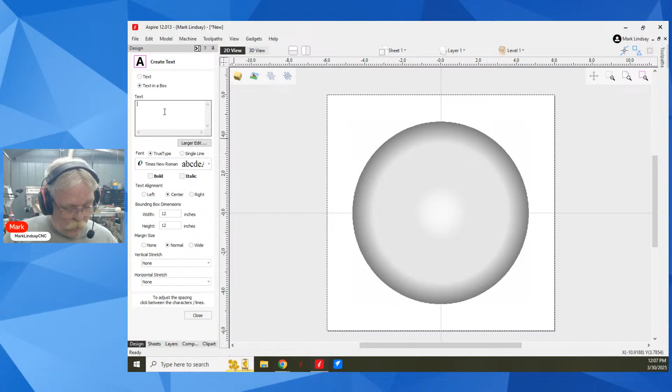Now I'm going to take my first initial, and as soon as all my fonts load up, I'll use Times New Roman. Good old standby, everybody's got it. Let me make it smaller so it fits in my dome. There we go. So I've got my curved surface and I've got my vector that I want to V-carve.

So we'll go over here. I'm going to select - well, first I have to do a 3D toolpath. Just for this demonstration, I'll set thickness, yada yada, everything is good. I'll put a gap above the model of 10 thousandths, which is what I normally do. I'll use a half-inch ball nose because it'll make this a lot faster.

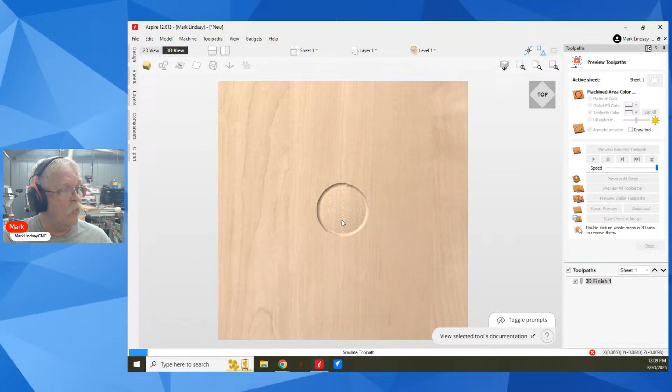I'll do the model boundary with a boundary offset of 0.5. We'll calculate it, get my shape here, and preview that toolpath. It's going to be kind of rough shaped because I don't have the step over set right, but it'll still work.

Let this get through. Evidently I've got my display set to maximum, which is why it's taking so long to run this. Come on, you can do it faster than this. I know you can. I've got my display set too high and I can't change it now. It's already too late, so I'll just tap dance here.

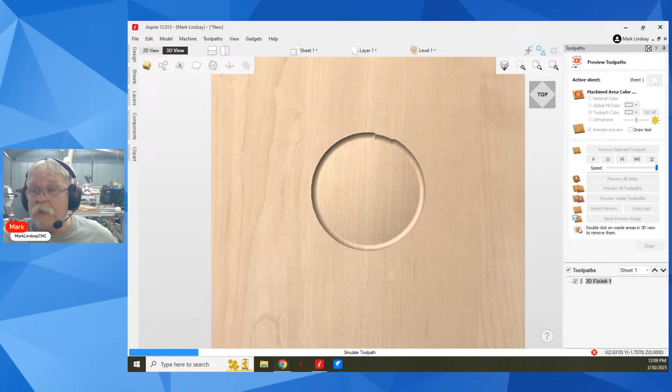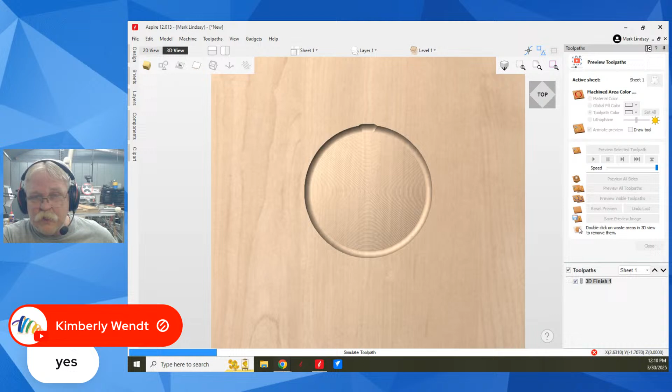Let me cruise up here and see if Kimberly has added any extra information here. Nope, I'm not seeing it. I don't know if that means a Fibonacci sequence or if she was answering somebody else's question.

Okay, the lot is the shape of a pentagon, and the 1,800 square foot house is the base of the pentagon. All right, that'll help a little bit. And you want the Fibonacci sequence? Yeah, we can do that.

Let me get through this slow thing here, and then we'll get into it. Basically, Kimberly, you can import anything into anything and then line it up any way you want to.

That is, if you're doing your design work in Vectric Software, which I have been known to do quite often. As a matter of fact, I designed my Shades and Mustache logo in Vcarve Pro, then imported it into Inkscape at the time and filled in all the colors, and that's why it looks the way it looks. But yeah, I drew it up in Vcarve Pro because I don't know how to use Adobe Illustrator or any of these other graphics programs.

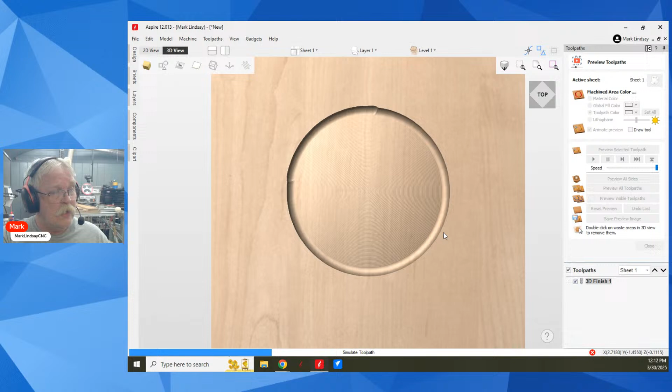Okay, I think this is good enough to demonstrate this. So here's another tip: if you ever need to stop a simulation in midstream, look down here where it says Simulate Toolpath, and over here you'll see a red X. You can click on that red X and it'll get to the next natural stop point within the toolpath, and it'll stop like it just did right there.

Okay, so now I've got my shape more or less. I can take my vector here and do a V-carve toolpath. Now I'll use a flat depth of 0.1 just for giggles. I'm going to get rid of that 15-degree V-bit and go with a 90-degree V-bit, select it, and I'll use an eighth-inch end mill should I need to.

And here is the secret: you come down to the bottom here, project toolpath onto 3D model, and put a check mark there. You don't need to worry about start depths, you can use a flat depth if you want to - I'm going to because it's fairly large.

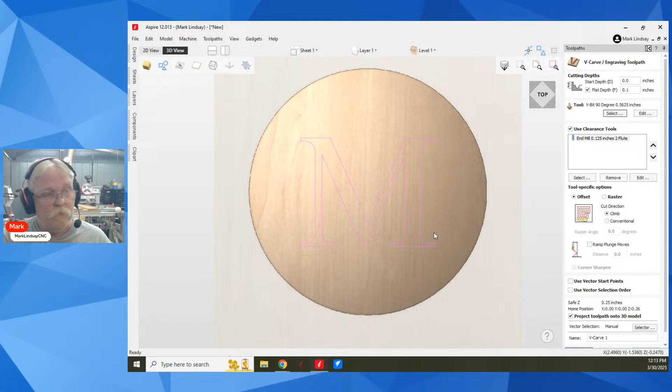And I don't want it to try to cut through the model. But it's that check mark right there that projects this toolpath onto the surface and makes that toolpath follow the shape of this surface.

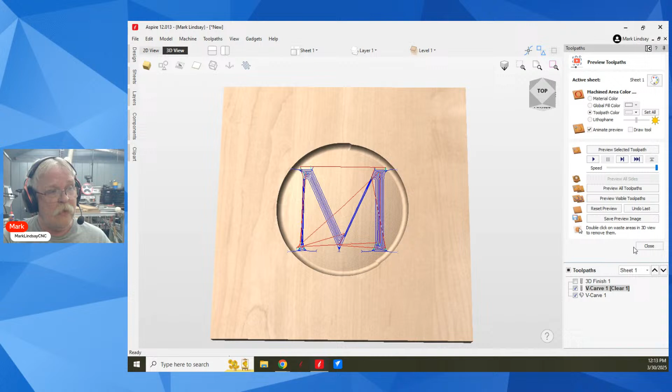So we'll calculate it. And it might work, it might not work. Let's see, I'm going to run the clearance first, that 1/8 inch clearance bit is going to run. And that'll carve that out. Then I'll come down to the Vcarve, and this is going to use the 90 degree V-bit, and it'll finish this whole thing up. Yeah, I should have let it run all the way.

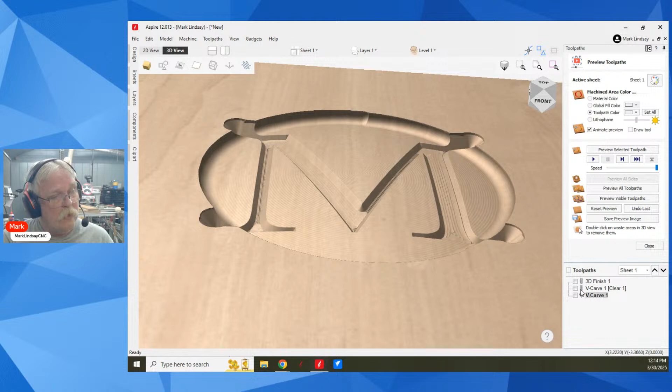But we don't have time for that. So that's how you get that Vcarve toolpath to follow the surface, is that little check mark right there. And that'll take care of it.

So all right, let's close that up. And we'll reset this preview because it's ugly. Go back up to the top and come back in full screen.

Okay, email me a photo, but no, I don't always have access in my shop. We can work on this tomorrow evening, Kimberly, if that's all right with you.

We'll get into it, but basically, yes, you can import anything into anything. You can import an image into anything. And then it's just a matter of how you want to line it up. So yeah, all right Michael, I hope that answers your question.

Like I said, just that check mark. Yes, I'm going to change it now, John. Thank you.

And for those of you who don't know what I'm talking about, let's take a look at it here. I'm going to close out of my preview. And I'm going to go up into Toolpaths. And I'm going to come down here to Preview Simulation Quality.

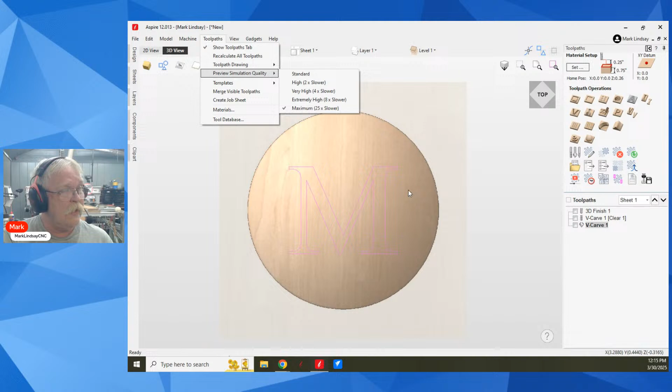This affects only this preview window. I have it at maximum because I left it as I was demonstrating something with it and left it there. When usually I'm out here broadcasting like this, I'll take it to high. And that speeds up the preview process, or it should.

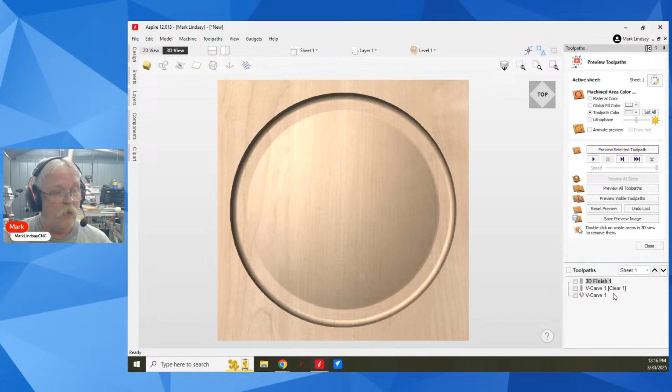Let's see, I'm also going to turn off animate the preview. And now let's see if this runs any faster. Look at how much faster that's running. It's not animating it, you don't see the tool, you don't see the tool path run. And isn't that better? Yes, it's much better.

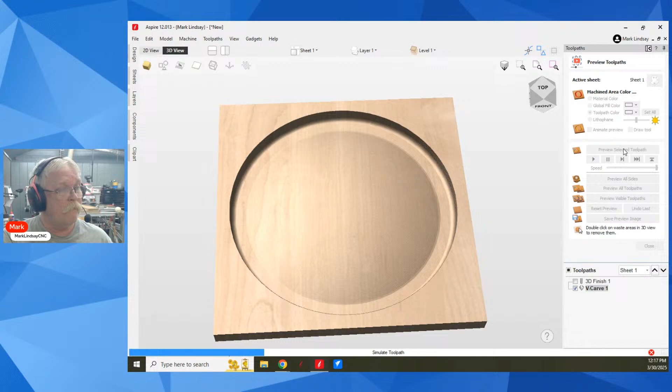Now let me go back in here and let me take out the clearance tool and just run the 90 degree V-bit. Calculate that. And let's run it, and there you go. That's a better demonstration. See how much faster that works when you're not trying to show off every little piece and get the best quality.

So there you go, all right, we'll reset the preview, close that, and come out of here. All righty.

So let's see here, we've got another one from Ralph Balchin, who says, when you need something to add to your program, will you spend some time discussing the use of layers? I continue getting layers intertwined and have screwed up several stack text projects. Okay, we can talk about that, Ralph.

The thing to remember about layers, let's come back over here into the 2D view. I'm going to delete these two toolpaths. Delete all, boom, don't need them. Come back over here and I'll get rid of the 3D model, I don't need it.

The thing to remember about layers is, first off, when I demonstrate layers, a lot of times I'll leave them named layer 1, layer 2, layer 3. Let's make this easy, let's go over to layers, I'll add a new layer. And again, add a new layer and add a new layer. Normally when I'm demonstrating, I leave them named layer 1, layer 2, layer 3, layer 4.

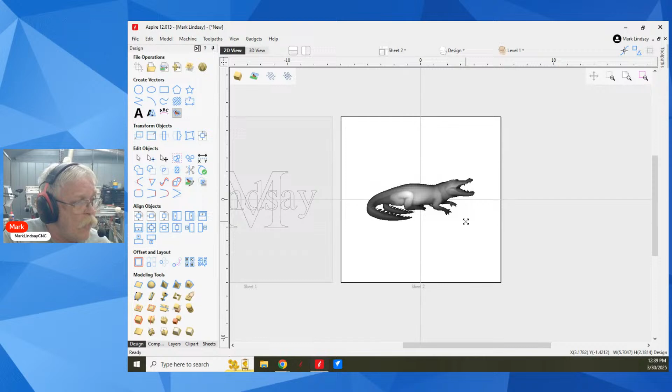Sad to say that Wally is only available on Aspire. He's not a Vcarve model, but he's got just enough detail to cheese me off, and he makes a good demonstration.

Ralph says thanks, Mark, I just need to be careful with layers, and I'll continue to use and associating with toolpath. Yeah, and Steve right there, ba-boom, right on the money every time.

Yes, there's my stacked text video, and again, I'll put a link in the description as soon as we're done live here.

Wally's got a little bit of detail, but just enough to cheese me off, but not enough to be overly dramatic, if you get my drift. So let's go over

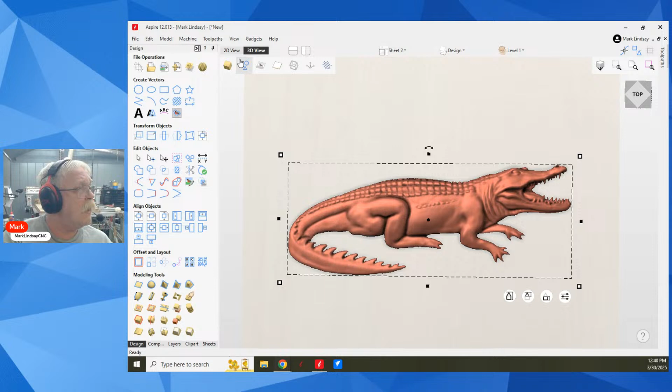and let's do a 3D finishing toolpath. Of course, it's going to send me into material setup. I'll put a gap of 0.01 above the model. He's only a 1/2 inch thick. Okay, we're good there - a little more than a 1/2 inch actually. We're all right.

Now, this would be an extreme case. Let's look at using an 1/8 inch ball nose. That's more of a 1/16 inch tapered ball nose - that's more realistic.

We're going to do modeled boundary, and I'll go with a 1/4 inch boundary offset. And what that means is the bit's going to cut outward away from the model by a 1/4 inch.

Fair warning, okay? If you use material boundary, it's going to go outside of your material a 1/4 inch. If you use a zero plane, if you have Wally down in a dish and you use model boundary, the minute you add a zero plane, it becomes part of the model. So fair warning: if you use model boundary with a zero plane, or material boundary with or without a zero plane, any boundary offset you set is going to carve off of the material by the distance of that boundary offset. Be careful when using either of these.

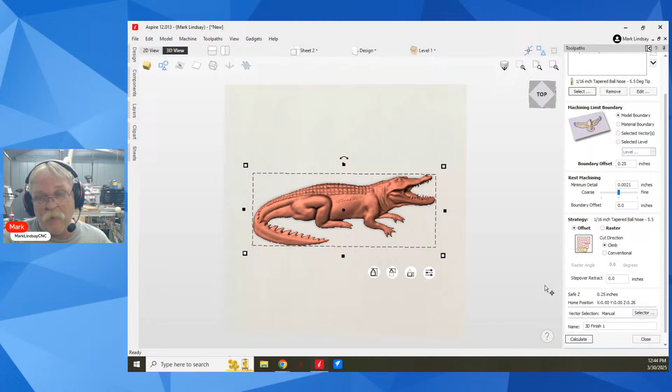Preview early, preview often—that's my motto. Calculate it, and we see it's made two tool paths. This is the first tool path—it's going to carve away most of the material. Turn that off, and we'll turn this on. This is all that 1/16 inch ball nose is going to carve.

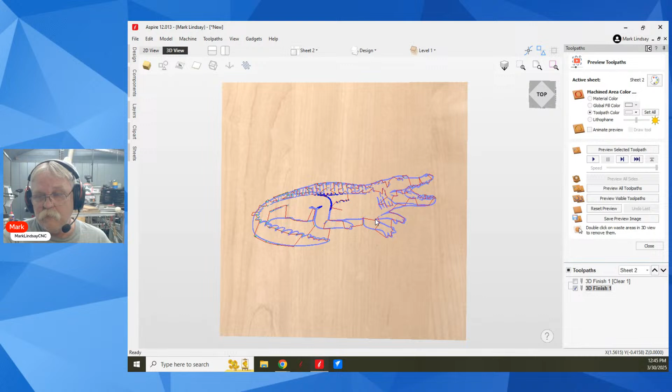I forgot to mention one thing. Let me go back into the toolpath. You have a separate boundary offset for rest machining. When we looked at that 1/16 of an inch, which is the lighter blue in this case, you can see it's not coming out very far. I'm going to go ahead and make it the same as the boundary offset for my clearance.

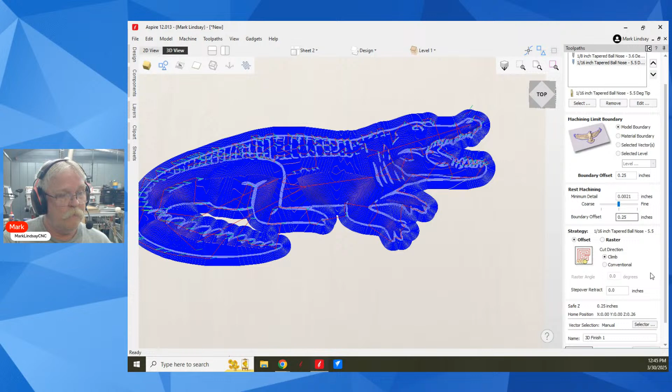0.25, just so we can see it. And that, there we go. Now I'll calculate. So the rest machining is going to come out the same distance as the 3D finish, the clearance. So we'll do the first one.

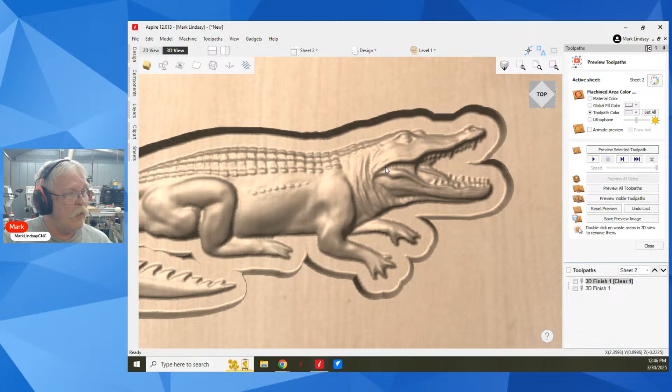And there's Wally. We've got some fairly decent detail here, but around his eyes, his mouth, that 1/8 inch bit just isn't quite cutting it. We see some roughness up in here that the 1/8 inch bit can only go so far. So now we look at the 3D finish using the 1/16 inch bit. We can't really see much of a difference until we zoom in, and we see a lot more detail right here.

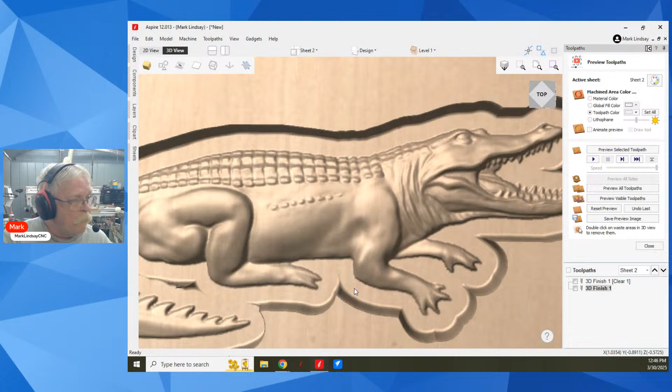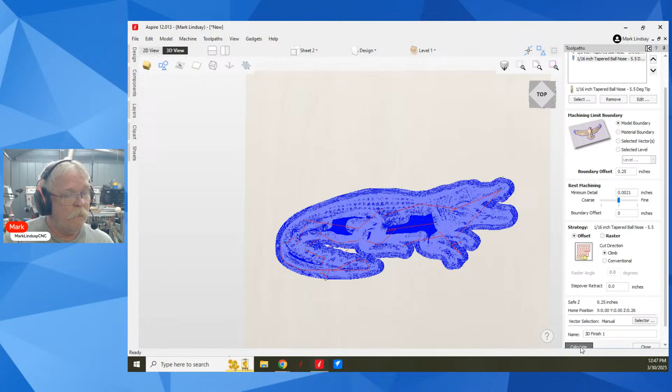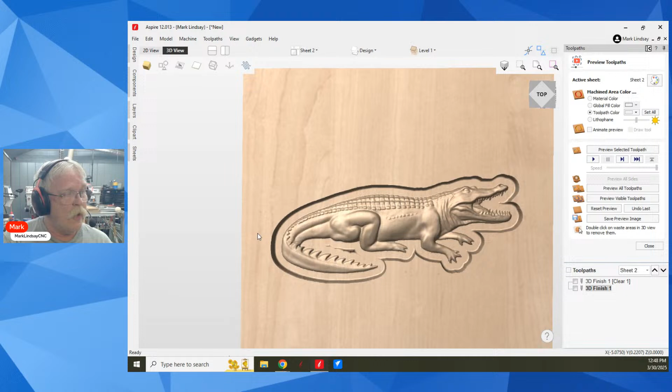But let's go back and take a look at something. If I come back in here and don't use a boundary offset, this is going to illustrate one of the cons. Calculate it. Now we'll reset the preview and preview this one first. Again, looks pretty decent. But here I don't have any kind of offset. When I preview that, it cleaned up around the edges and defined these rectangles a little bit.

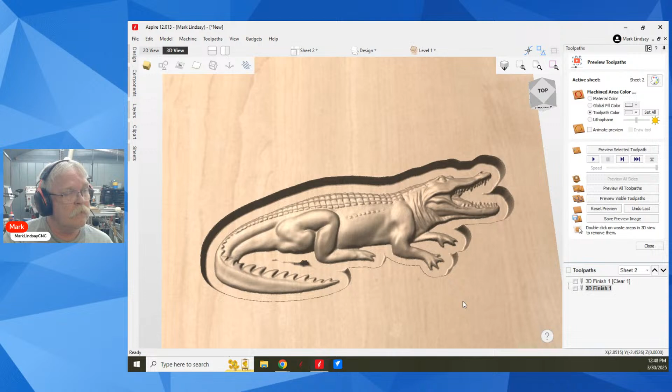But if I zoom in here and look, we can see a little shadow line right there. Okay, this comes down to modeling resolution and the diameter of the bit. We can really get down in the weeds here.

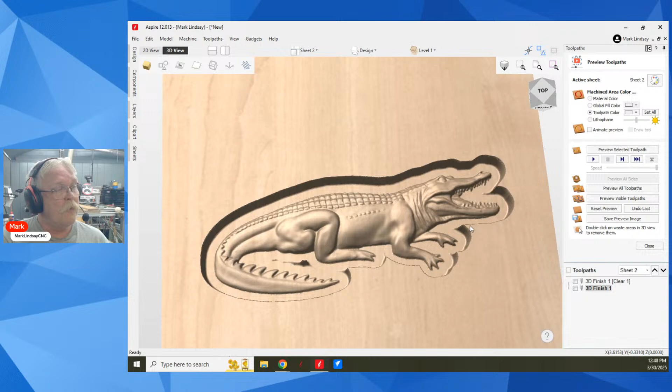Won't the simulation resolution also make a difference in how you see the results on screen? Yes, and that's all it affects—that's the simulation resolution up here, preview simulation quality. But if we look down here, we can see a little shadow line right there. It's because we didn't use that boundary offset. And like I said, this gets way down in the weeds.

When you first set up your job, you set your modeling resolution. You're dividing up the surface of the material. In this case, because I have it on its lowest setting, I've divided up the surface of this material into 1 million points or pixels.

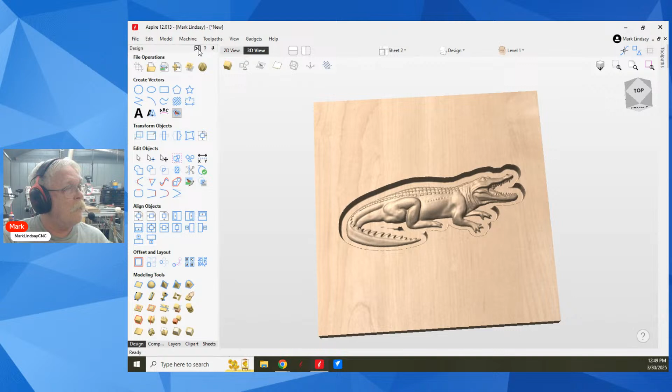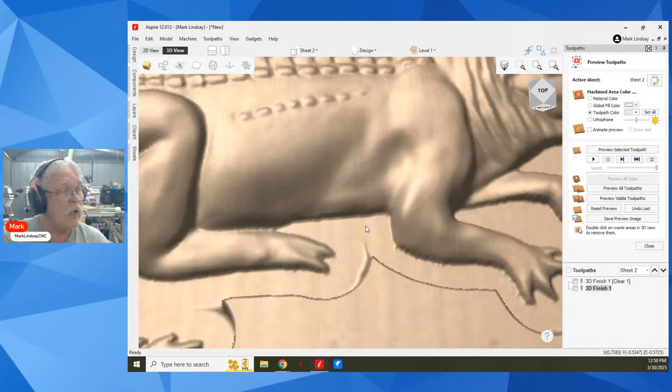Because the tip of this bit is smaller, it can carve pixels that the 1/8 inch bit can't. That usually means you're going to get this little shadow line where your rest machining bit, this smaller bit, will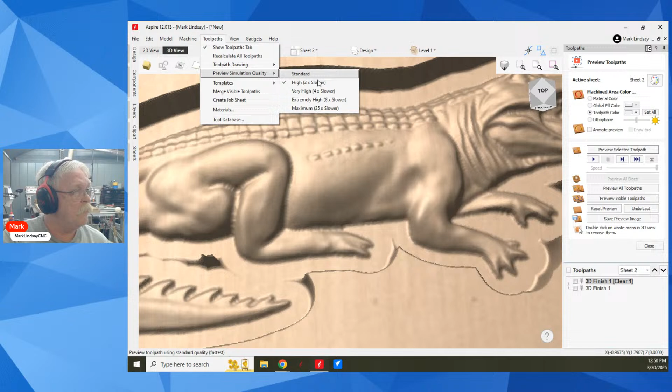Actually cut deeper than that 1/8 inch bit. So the way to combat that, let me reset the preview. I shouldn't have done that. Let me go ahead and do this here. Preview. Then I think I should be able to do that. Nope, it's going to make me redo it all anyway.

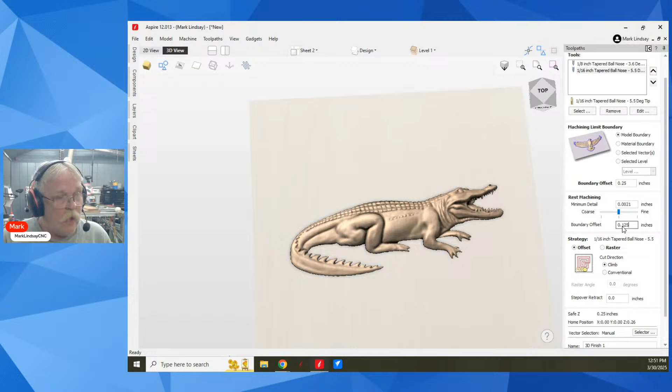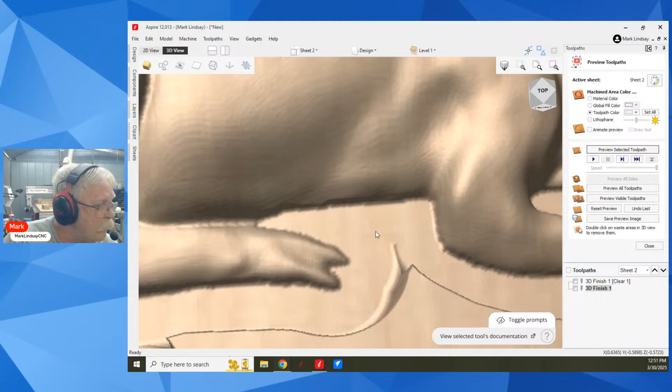I'm trying to make this shadow line more visible. Okay. And that didn't do anything. It didn't make it more visible or less visible. There is a shadow line. You can't really see it here in the preview.

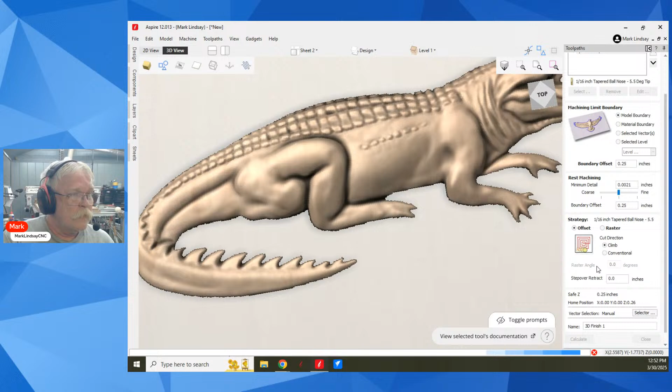But suffice it to say, if you bring that boundary offset out to the same boundary offset you have out here, you will get rid of that shadow line. There won't be one at all. But again, you're also taking a chance that you're not going to be carving into something else. By making that offset, it's not just going out here, it's also going up in here. So you may be recarving something up in here that you didn't want to carve into.

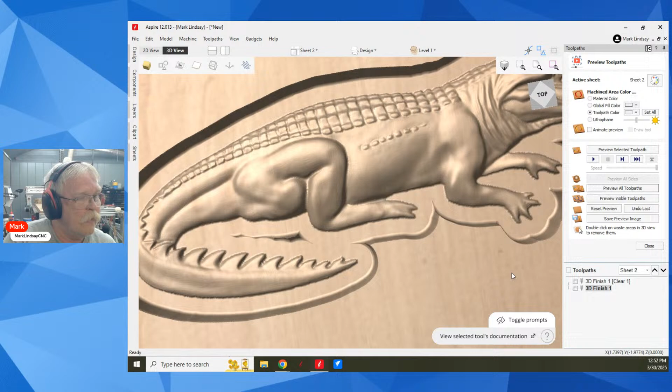You may be creating shadow lines out here. You may also be creating shadow lines up here. If we look at where this goes, you see how it's recarving up in this area as well. So this is something you need to play with. It may work out perfectly for you. It may not. A lot of people don't like rest machining at all.

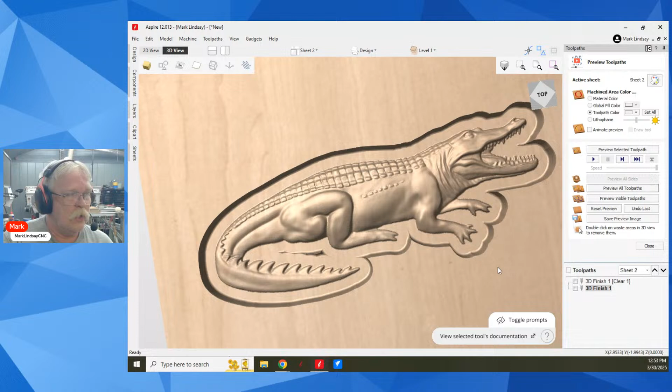And so what they'll do is just use the smallest bit and not use a larger bit. That works okay if you don't mind the extended finishing time. Now we're going to do the whole thing with that 1/16 inch bit. It only added about 12 minutes to the machine time, but depending upon how intricate your design is out here, it could double or triple it.

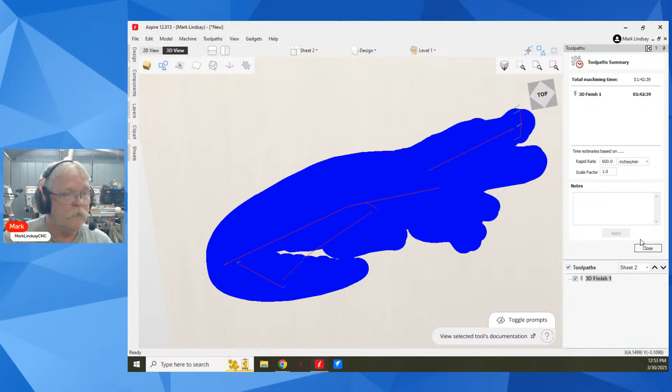So it's a balancing act. They both have their place and they both work very well. Rest machining I use on occasion, but generally speaking, not really. I'll just go ahead and carve the whole thing with the smaller bit, you know.

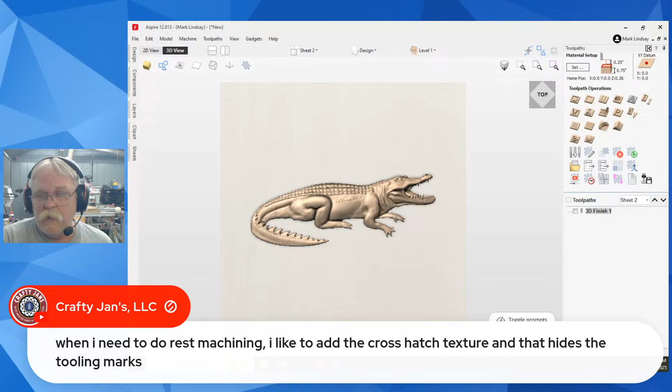So Kurt over at Crafty Jans has a tip. He says when I do rest machining, I like to add the cross hatch texture that hides the tooling marks. And what Kurt is talking about is adding a texture to the background, and yes, it does hide those machining marks. I will be doing a video on that soon.

I'm definitely going to do these two icons here, they're going to be my next video. I may do that crosshatch texture as a separate video after that.

Wendell says you need to get the Z0 on both bits the same and have a machine with good repeatability. Yes, that is true. And it's good that you mentioned that, Wendell, because machine repeatability is something that a lot of people don't discuss, because you have varying degrees of repeatability. For instance, repeatability on my Avid CNC is 1 thou. So there's 1 thou. The repeatability on my touch plate is 1 thou. So there's two, you know, so things can compound.

Now you add that with what we tend to do, like if I'm going to surface one of these pieces of material here, using my cursor like you can see it, if I'm going to surface one of these pieces of sapele here, and I set my Z0 to the surface, my machine is repeatable within 1 thou, and my touch plate is repeatable within 1 thou. But that does not necessarily mean I'm going to get all three of these pieces of material to the exact same thickness. They could be a few thou off either way. So the potential is there for this piece to be 4 thou thinner or thicker than this piece.

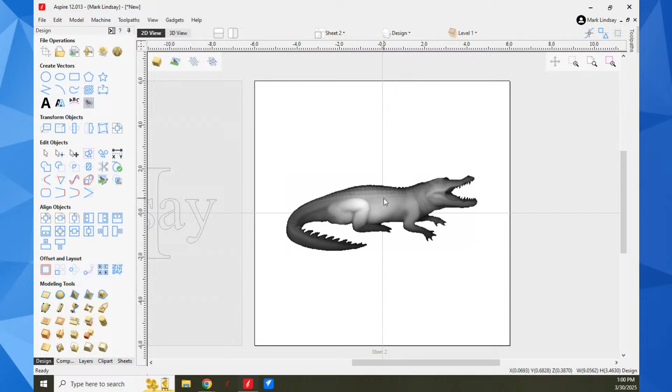All right, let's see here. We'll go back over to the 2D view and we'll get rid of... well, I'm not going to get rid of Wally. I'll go back over to my first sheet by double clicking that first sheet. Now, you want to draw a line and you want it to be straight. This is where you make sure you have geometry snapping and smart snapping turned on, specifically smart snapping. Smart snapping is going to help you in this endeavor, Alan. We'll come over here and I'll click.

Now we've got several ways we can draw a line. One is just freehand out here. You see this guideline? You see how my cursor says 0.0? Right now we're at length 7.5, angle 0.0. That's a straight line. Click, then spacebar to accept that line. Now, if you look, as I zoom in, you may see little zigzags on occasion.

But those zigzags aren't really there. What it is, is your screen refreshing as you zoom in. Now, I can come in here with it selected, go into node editing. There are two nodes, start point and stop point. Come out of node editing.

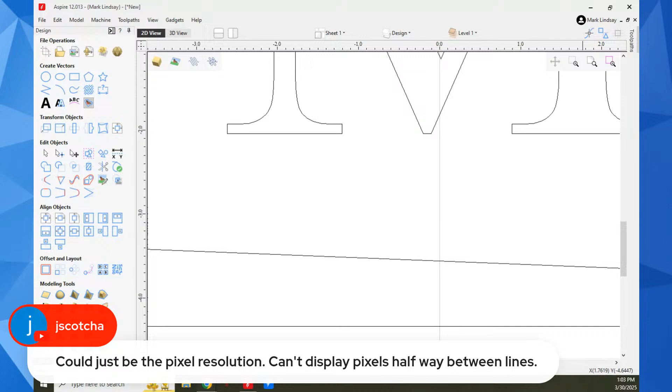Now, another way to draw a line that doesn't rely on how steady your hand is, Alan - we'll start the line here, and we'll come out here where we want the line to start. Click, and I'm going to drag in a direction, but I'm not going to click. I'm not even going to touch the mouse. Instead, I'm going to come up here and set an angle. I want an angle of 0, and I want a length of 7 inches. Then I'll click Add, and that created my 7-inch line, perfectly straight because my angle was 0.

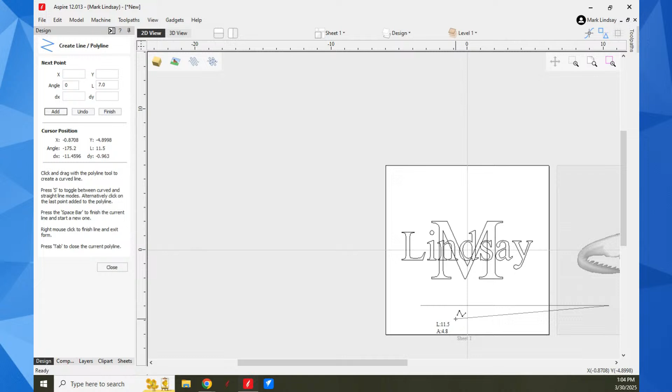Okay, again I have to spacebar to accept that line. Well, nope, I spacebarred and it did it again. Control Z, close. And there's my line. And again, start point, end point, node editing, there we go.

So there is always more than one way to skin the proverbial cat. It comes down to whichever way you prefer. You can draw a line and rely on smart snapping, or you can use these points here.

When you're in the 3D view, things get a little bit dicier because you have to be right on top of what you're drawing. And that's because of a phenomenon known as parallax.

If you are off, let's do an extreme example here. No, let's do that. And I go to draw a line out here. It's going to tell me where I am, but am I sure where this is actually being drawn? And am I certain this is straight?

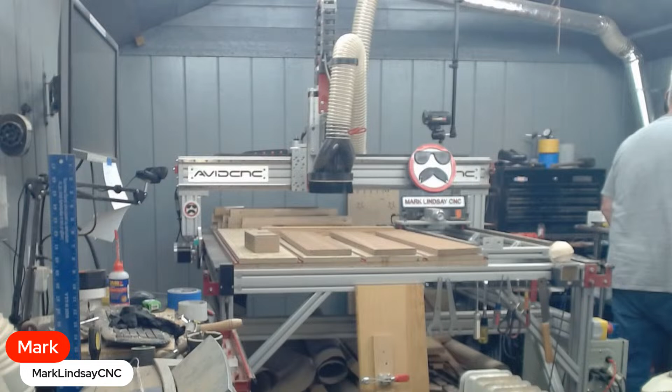I use... boy, let's get these out here. There we go. Oops, nope, grabbed the wrong one. Yeah. Keep everything over in my paint locker. I use

these on corded drills. All right, this one is 240 grit, and this one is 400 grit. This is more for those little intricate pieces, as I was talking about,

that you're going to be holding in your hand, and you need real good detail. But in the metal world, these are mainly used for polishing. If you've got something big that you're cleaning up fuzzies off of and what have you, this is really not going to do much. It doesn't remove much material at all. You can polish aluminum with this just about.

That's 400 grit. This, on the other hand, being 240, is a little bit more aggressive, but you really, really have to try to remove detail when using this. I mean, and I use these on a corded drill, and I just go over it with this brush, and it removes the fuzzies and sands 3D carves.

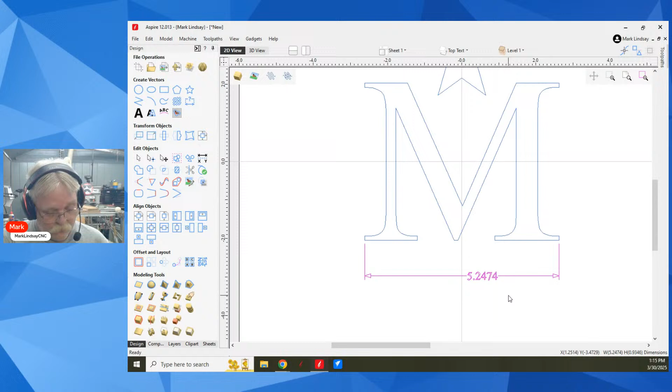I can ungroup and nothing happens, ungroup, nothing happens—it's an object. The only way I can edit it is to go back into dimension. Come along. I can't even do that.

I can't even do that. I have to draw another dimension, so I can't edit it at all. What I was going to try to do was get a dimension and move this dimension line to here, for example. So that's the difference between a measurement and a dimension.

And well pointed out by Dwayne, if we come up here, dimensions are on their own layer, and that color is pink. You can carve the dimensions, however.

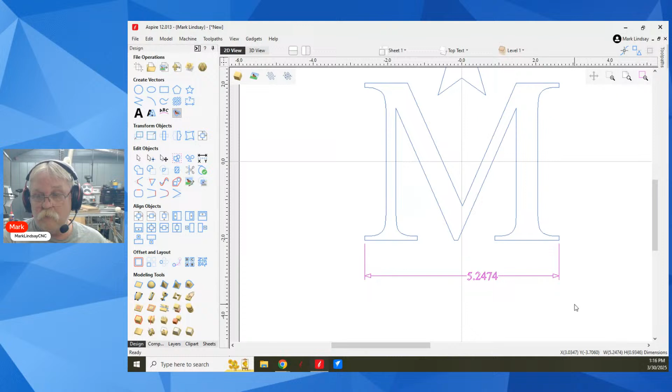So come over here, selected. Let's V-carve the dimensions. Not going to worry about a flat depth, not going to use a clearance tool. That is so tiny. I'm going to select a quarter inch 15-degree V-bit. Calculate—it's not going to do it.

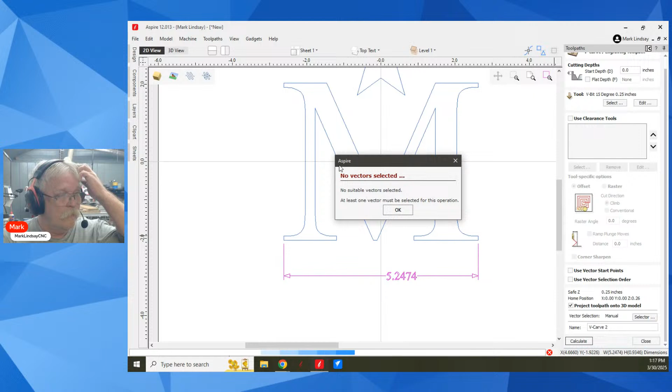It's not going to do it. Close. Let me right click—can I convert that to curves? I can't convert to curves. Oopsie, can't carve them.

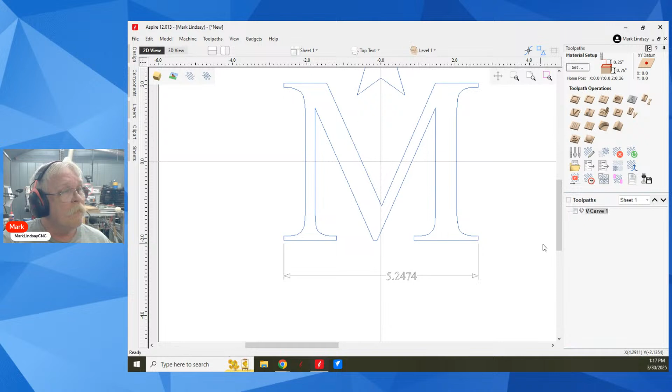Ellen here is saying Amazon has the same sanding puff balls in larger amounts. I go through tons of those things. If you're talking about the Scotch-Brite looking puffy balls, I don't like those very much. I have tried them—I think I ended up throwing that out because I don't like it. I'm not much for those Scotch-Brite puffy ball things.

I much prefer the radial discs.

Let's see, did I associate the toolpath with a layer? No, I did not. If you mean this here, no, I did not associate. And again, remember, the dimensions are on their own layer, and it has not been associated with any toolpath.

So let's see here. So no, Jim, you can't carve it, but what you can do is draw it yourself.

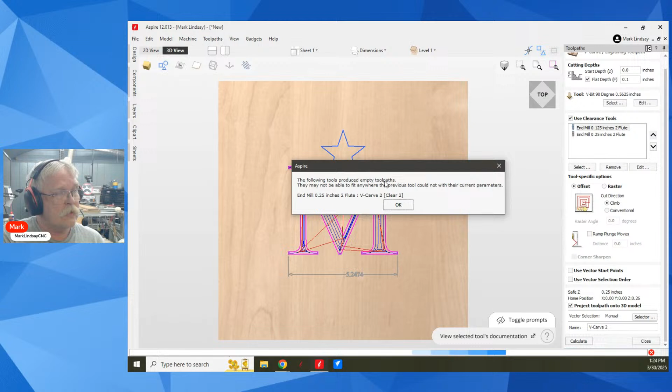Okay, let's go back into it, and I'm going to move the 1/8 inch up on top. Calculate. You see, it's not going to let me do this because the 1/8 inch end mill is first. It's going to carve everything, so there's not going to be anything left for this 1/4 inch bit to carve. So it's telling me that it's going to produce an empty toolpath. Okay, and there it is.

Now, if I go up here to clear 2, which uses the 1/4 inch end mill, and I make it visible, it's an empty toolpath, it's not going to cut anything. Everything's being cut by the 1/8 inch. Turn that off, turn this on, everything's being cut by the 1/8 inch. So if you used 2 bits...

I use the 1/8 inch bit for the big clearing area and a 1/4 for the small area. That 1/8 inch bit is going to carve everything because it can reach everything that 1/4 inch can reach. So I don't know if that answers your question, but if that's a concern, only make sure that they're in the correct order. Bring that 1/8 inch back down beneath, so I've got my larger bit on top going progressively smaller down below.

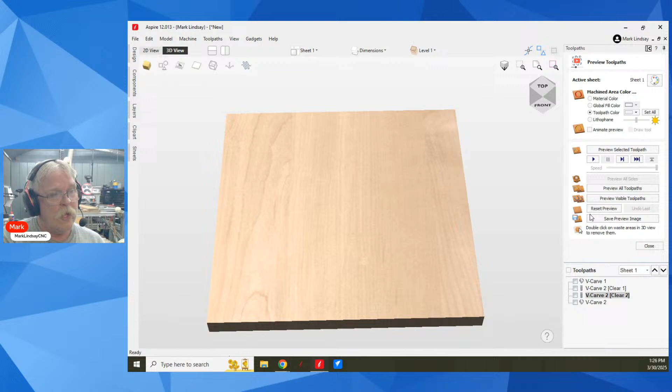So what do the light cyan lines in the 3D view mean? It depends on what you're talking about. If we're over here on the toolpath side, these light cyan, if we're in the preview window, the light lines are plunge moves.

They're plunge moves. If we're not in the preview window and we're just in the 3D view, let's go back over here. The only light cyan lines you will see are when you're in a drawing tool. You come up here and you could just barely make them out. You've got guides, and that's when you have snapping turned on.

These lines here are showing me I'm at the center of my project in Y. And over here, it's showing me that I'm at the center of my project in X. And now they're showing me, come on. There we go. Now I'm at the center of my X and Y.

Close. Control Z. Okay, I hope that answers that.

Yes, when you are reading a toolpath out here in the preview, we'll look at this, okay? The red lines are rapid moves. My X0, Y0 is in the center of my material. So the red is a rapid move over to here where it's going to make its first plunge cut. And it's going to start cutting till it gets around out here.

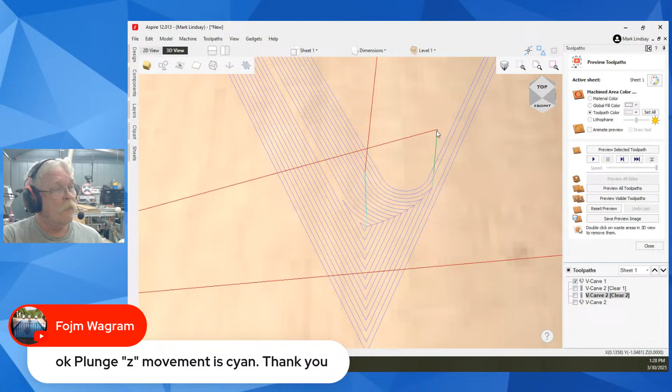Green is a retract. It's going to come up out of here and make a rapid move over this direction where it's going to plunge and start cutting. Then you can see this blue here. This is down in the material. It's going to cut this out, move over, cut this out, move over, cut this out, move over.

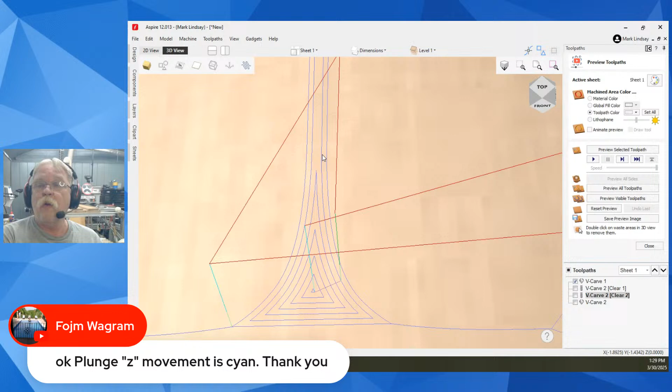The dark blue lines are actual cuts. So the cyan, light blue, is a plunge. The green is a retract. Red is a rapid move where the tool is not in the material. And dark blue is a cut where the tool is down in the material. That's how you read a tool path in the preview window.